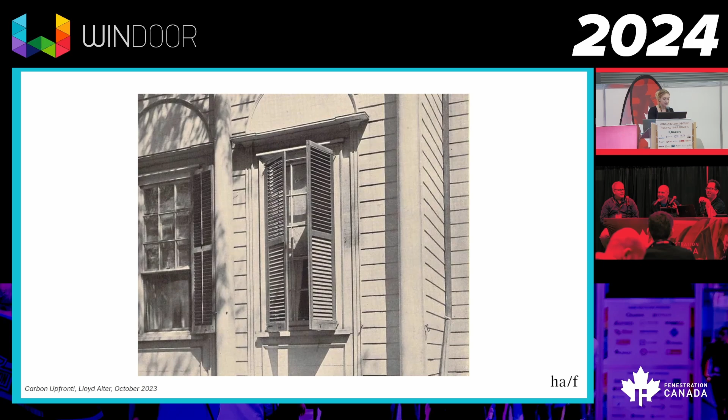And a lot has changed in 200 years. We still are designing some very smart technology, but we also have artificial light and mechanical ventilation. Windows are often treated as a more decorative element in a facade, designed from the outside according to how they look rather than maybe how they work. Speaking from an architect's perspective here.

Right, next time I need a Britney mic like you, Terry.

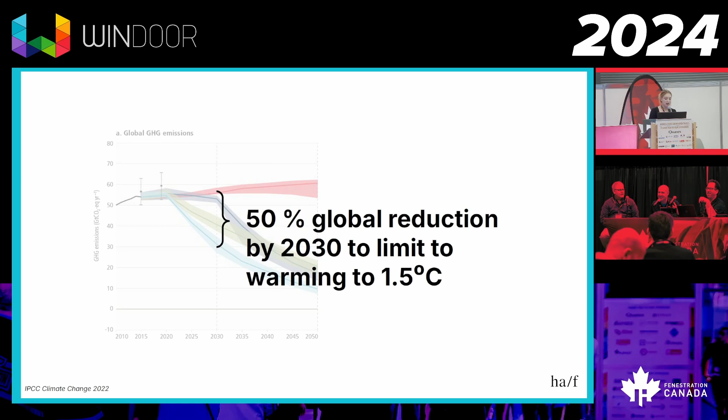And designing for climate resilience is an important part of the equation, and part of the equation as well is lowering our carbon emissions. The IPCC, the Intergovernmental Panel on Climate Change, has established 2030 as a critical year at which to chart our progress, needing to cut global emissions by 50% to limit warming to 1.5 degrees. And when we say 50%, 50% of what? In our industries, we're talking about building materials and building operations, where the building materials are roughly 11% for the core and shell, so the structure and the envelope, and then 10% for all other building material manufacturing. And then that 28% belongs to the operational emissions associated with the building. And windows and doors are important to both of these components.

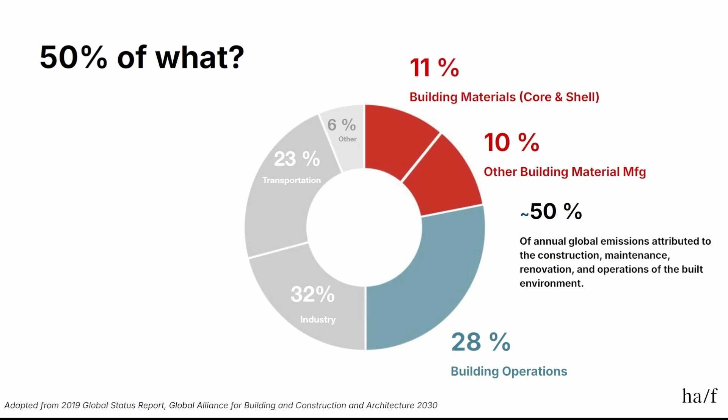And so in recent years and decades, the focus has largely been on operational carbon, the thermal performance of our buildings, what the carbon emissions are from running the building. And more recently, we've sort of exploded that view out to consider the emissions through the whole life cycle of the building and all of its material components. Is anyone familiar with whole life carbon, embodied carbon? The literacy is growing. Great. So A1 to A5, that's all the manufacturing of the raw extraction materials, making it into a product, bringing it to site, putting it into a building. In the use stage, the B stage, which is of particular interest to me talking to a group here, is all the replacement cycles throughout the building, right? When a system fails and we have to go in and replace it.

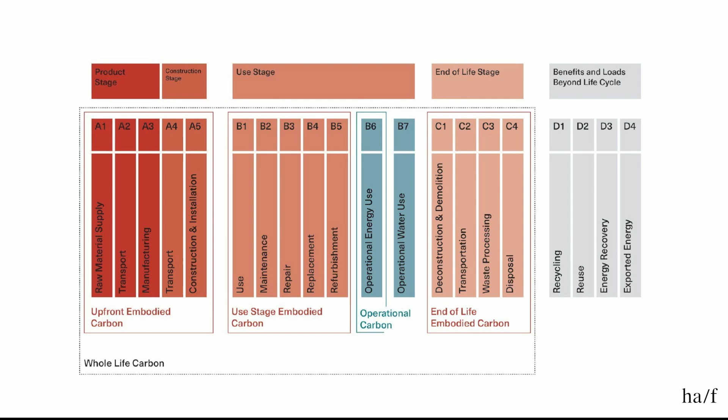Then we get into the end of life stage. So what happens when the components can't be replaced. We have to get rid of the whole system. Often we're landfilling, sometimes we're recycling. And then D is benefits beyond the life cycle. That's where we get into reuse, material reuse.

And so we can view the life cycle as a graph with number of years along the x-axis. And we can elaborate on that B stage or B phase. So we've got our practical completion in that tall bar at the very left. So that's the embodied carbon. All the red bars here are embodied carbon. So now my building is complete. I'm handing over the keys. My blue bars are the operational energy that we're just assuming is consistent over time. Of course, with a decarbonizing grid, we might see that go down.

And often operational carbon contributes more significantly than embodied carbon, but when your grid is a bit greener, we start to see some of that switch around. And so when we get to later in this presentation, that B phase is what I'd like to revisit, or maybe in the Q&A we can talk more about that.

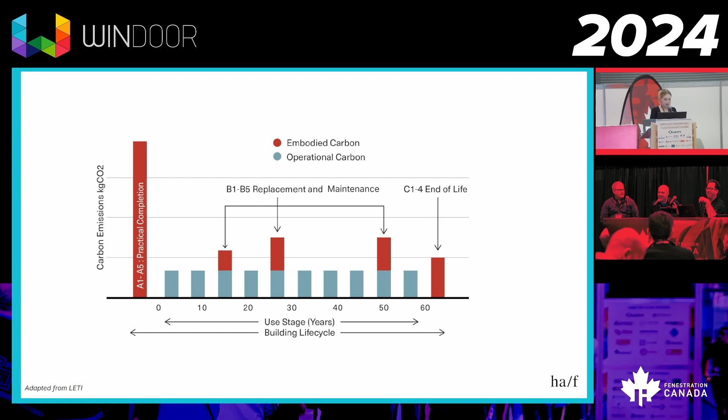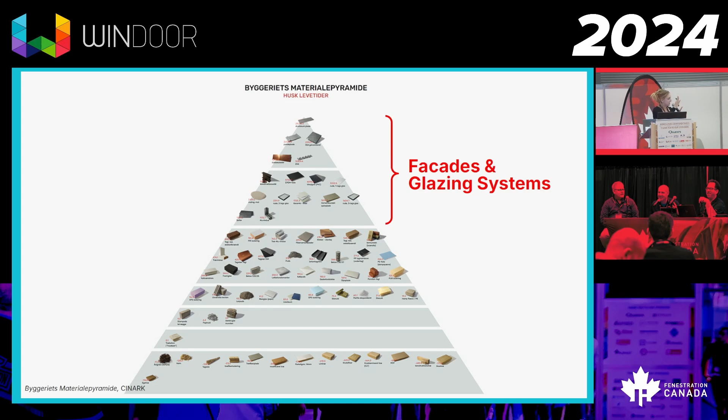It's also driven by the fact that often glazing systems are made up of materials that sit at the top of this material pyramid that tend to be a little more carbon intensive. This is a pyramid out of a Danish institute that if you go onto the website, it's live, and as you input quantities, it auto-generates what's highest carbon. It's a pretty cool tool. And of course, there's some drive in the industry to reduce embodied carbon, especially in flat glass, which typically has dominated the carbon of insulating glass units. This is a low carbon flat glass from AGC.

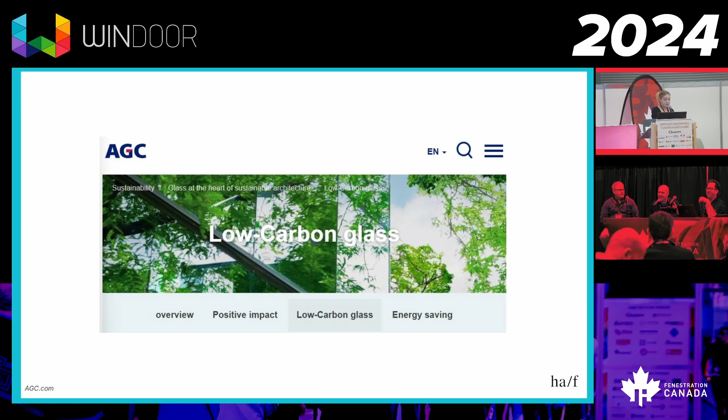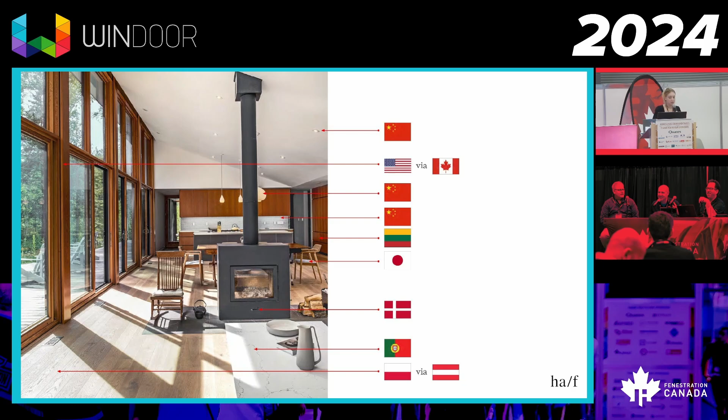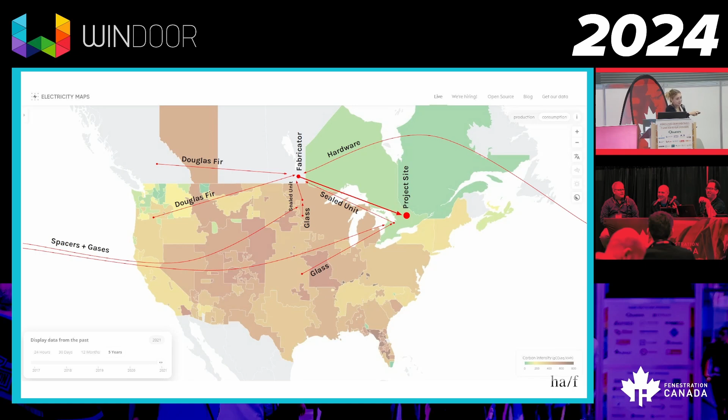And so he identified where all the materials were coming from and used EPDs, environmental product declarations, to map carbon data onto the quantities of material that were happening in his cottage. And a really interesting outcome of this was the revelation that our supply chains are quite complex. And this is specifically those big, beautiful windows, all the travel distance that the different components of those windows took. And you can see there that the sealed unit goes past the project site to the fabricator and then right back to the project site. So there's some redundancy in the transport there too. And all that transport comes with carbon emissions as well.

So what we know, my company, we're architects, but we are consultants, and we consult on anything sort of sustainability related to the built environment. We do a lot of benchmarking, life cycle assessment for firms where they want to understand how their projects are performing. We take quantities from, usually if they've got a really beautifully modeled BIM model, Revit model, that makes our job a lot easier. And we map the EPD, or the environmental product declaration, onto those quantities. We then will add, this is envelope specific, but we'll add the structure. Sometimes we go to interiors. More and more, we're looking at MEP systems.

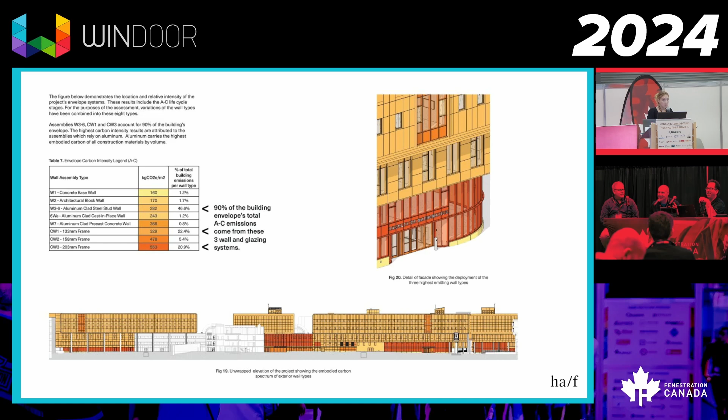And when we look at the envelope, we can create these kind of heat map drawings where very quickly we can see what the relative intensity of carbon is across different systems. And where the darker colors are is typically glazing systems. And so this kind of assessment and the visualization has encouraged us to interrogate the glazing requirements specifically here for the ground floor commercial spaces, which are often just floor to ceiling glass. Could the height be reduced, for example? Could we reduce the total area of glazing?

And by repeating this process for every LCA project we do, we are compiling a larger database of varied envelope systems. We have found that the consistent finding is that the glazing systems tend to be where the carbon lies a little bit higher, and often in that ground floor commercial. This is not to just, pardon my French, shit on everyone. I'm saying this is the opportunity, right? There's an opportunity here. And of course, when we consider the embodied carbon, it's really critical to consider the operational performance of these systems as well.

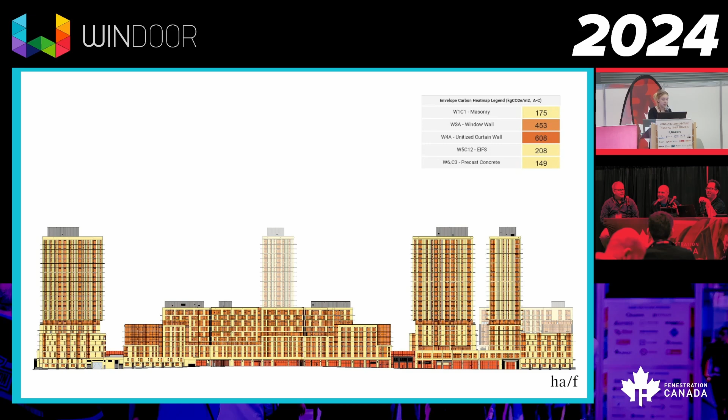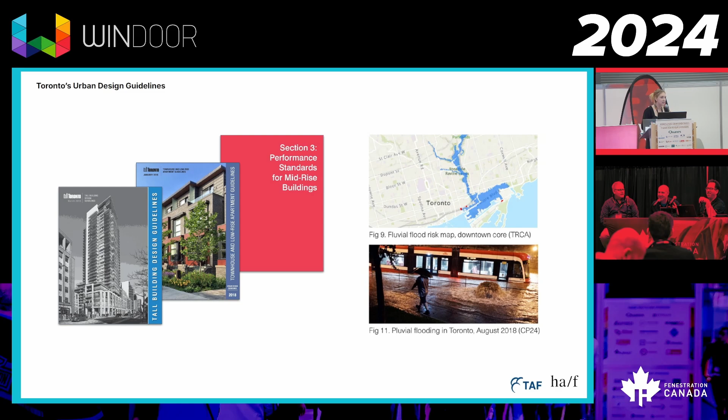And so these project-specific studies that we've done are very informative to our clients. They're informative to us. Recently, we were engaged by the City of Toronto to look at their own urban design guidelines, which were written 30 years ago, and we sort of said, what are the unintended consequences of these guidelines? Are they inadvertently causing higher amounts of carbon in our buildings?

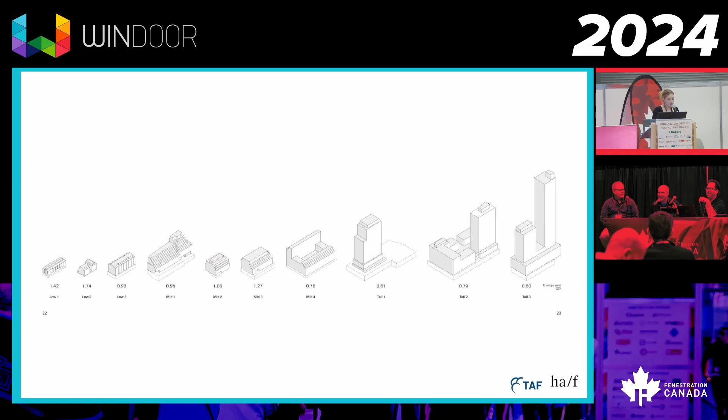So we looked at 10 projects: 3 low-rise, 4 mid-rise, 3 high-rise. You can see them there on the screen. And again, we did our little heat map trick. Across all projects, the highest contributor on average to the embodied carbon in building facades were the windows and glazing systems. Viewed across the whole life of projects, this factor can double or triple depending on the expected service life of the system. So that's when we get into that B phase. How long are we assuming the system is going to exist for? Are we actually maintaining it as it should be?

Windows and glazing were found to be the locations of greatest thermal heat loss and solar heat gain, the greatest contributors to operational emissions. And the facade of a building, as we saw before, can account for anywhere from 15% when we're just looking at those initial emissions to up to 40% when we consider the B and C phases. One of the significant factors that influences why these are more carbon-intensive parts of the building is the overall window-to-wall ratio. A lot of these towers had no opaque systems other than the shadow box that was part of the window wall.

And so a higher window-to-wall ratio can offer benefits like we talked about just before, like daylighting and views. But as I mentioned, they also typically result in a higher demand for heating and cooling. These glazing systems, we've found in the conversations we've had, and this is something I'd love to hear from the experts here, hold a greater need for maintenance and replacement over time.

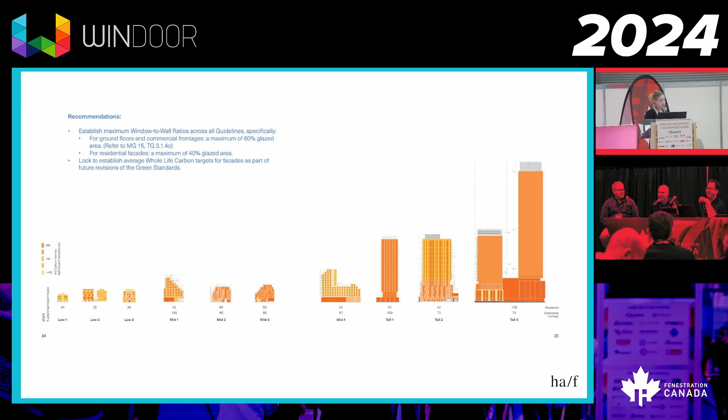And what's really critical for what I do for a living is that there is a serious lack of data to do this kind of analysis. We have some product-specific EPDs that we can use and rely on, but not a ton, right? So to make my job easier, it would be great if everyone here who works for a window company would apply a little pressure on that side, because it would just make the data more reliable at the end of the day. Before we even had whole window system EPDs, I had to model out an entire frame, get the volume, get my glass, get a volume, and build my window system myself using EPDs for each of those components. So we're moving, but it's still not there yet.

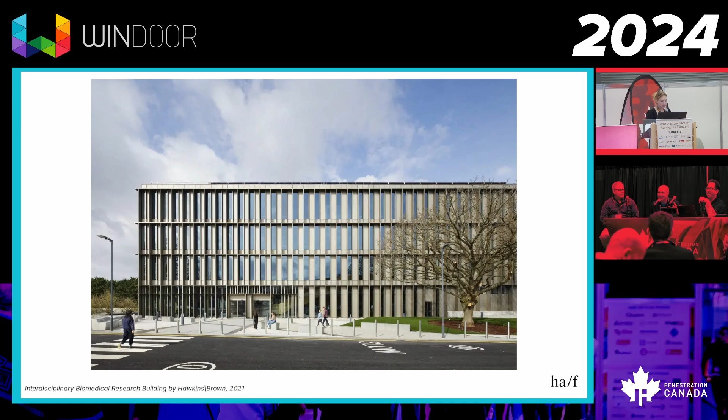In one of the projects we looked at, that I'm not allowed to share with you, it's a very large and entirely glazed project, a university facility in the US. And we did exactly that. We said, what if instead of the shadow box, we replaced every instance of shadow box with a steel stud wall, insulation and a metal panel? And we saw a pretty significant drop there, a 76% reduction.

Now, there are holes you can poke in this assessment. How do you, the whole frame went everywhere. We didn't totally get everything 100% there, but it was a good gut check to see, well, if they had designed windows where windows had to be, and then opaque wall where opaque wall could go, what would that mean for emissions?

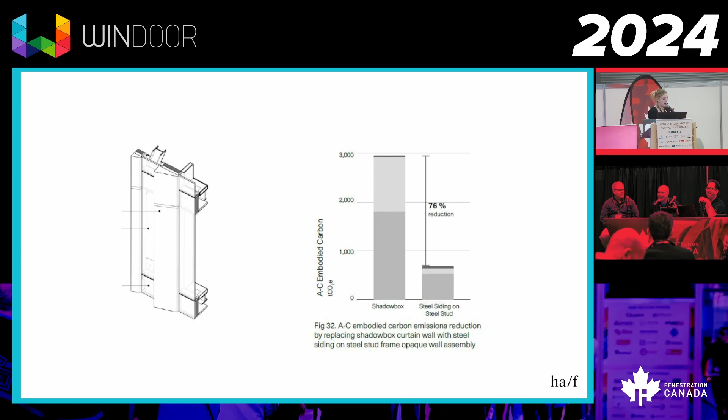And where in the building do we want larger areas of glazing versus areas where we can have smaller windows? How does climate influence how much glazing we design for? How do we rethink the current dominant ways of designing to prioritize more specific views? PietriArchitectes in Aubervilliers, France, put a picture frame around the smaller windows. So they needed the smaller windows to hit a certain energy performance, but they wanted them to still appear bigger. And so they did this nice little kind of wood framing inset window.

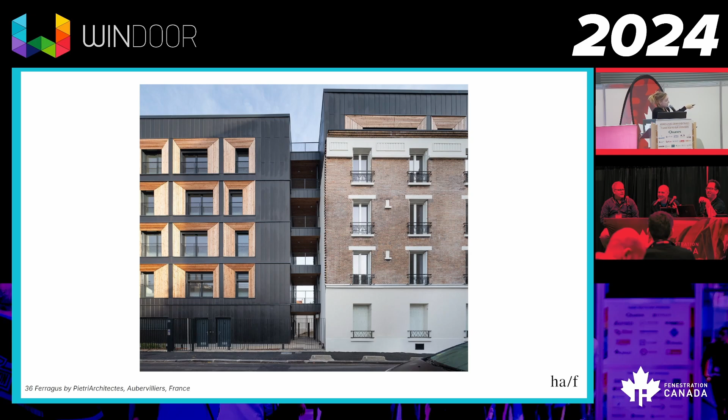And I just like this image because it's showing you the kind of new multi-unit residential build on the left with windows that are almost the same size as the older building that it's adjoining on the right-hand side.

Number 2 is we can design for wellness and resilience. So, climate change, that's what I kind of started my talk with. And I think that that is the big umbrella thing looming over us, the big cloud looming over us. I mentioned biophysiological needs. So the balancing of circadian rhythms, having visual contact with external environments, having operable windows to refresh indoor air and maintain good air quality, reduce summer discomfort if you don't have AC, for example.

This is an image from a Maggie's Centre, which is a cancer treatment center in the UK. They have them all across the UK. And so we're still seeing pretty tall glazing, but we're not seeing it wrap the entire building.

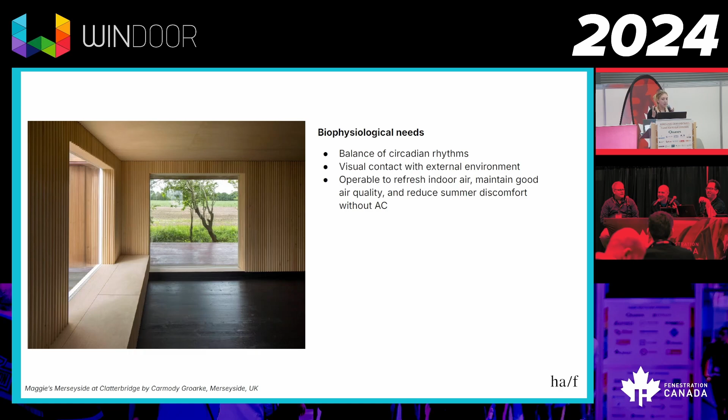In France, I was born and raised there, so there's a couple France shout-outs here. I'm a little biased. But I also just found this out while I was preparing for today. Since January 2022, there's a new environmental regulation, RE 2020, and it has requirements to reduce energy consumption, reduce the life cycle carbon, and address occupants' thermal comfort in summer for non-air conditioned buildings. Because a few years ago, when we had a huge heat wave there, a lot of people died. And that's something that we'll face in all countries.

And so they developed the metric degree hour of discomfort, DH. And this must now be considered in the design to limit discomfort during periods of high heat and to avoid the widespread use of mechanical cooling, but with systems in place to require a minimum amount of glazing as well. They usually say 1/6 of the facade has to be glazing.

And my company is currently working on, are folks familiar with the Canada Mortgage and Housing Corporation, CMHC? Yeah, right. So we're working on the new catalog, which is all focused on infill development. And we were just in Ottawa last week, we were meeting and they handed around all these old catalogs. And the big difference that I noticed between the old catalogs and how we're designing new buildings is a lot more overhangs and shading devices in the old ones.

Shutters, overhangs. These are all design features that protect the facade, right? That provide shading. So we're really interested as we're engaged on this project to see some of these get baked back into the future catalog. And how a climate sensitive site layout and building design, including fenestration, but also these shading devices and then things like natural ventilation offer the possibility to reduce our use of electricity for indoor residential lighting, as well as reducing heating and cooling demands.

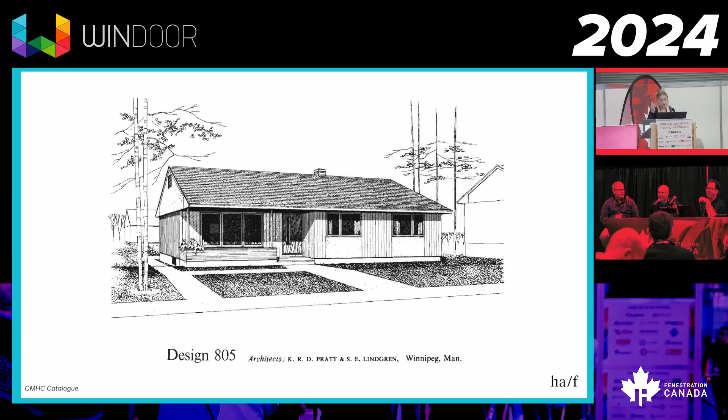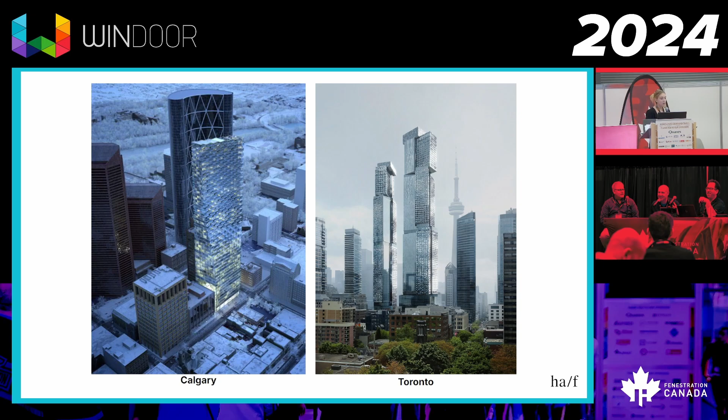Next, we come to considering whole life carbon. And I've got 2 images here, one of a building in Calgary and one of a building in Toronto. And these are both coined as high performance buildings. And it's really crucial to understand, I'm here coming from the embodied carbon lens, and I realize there's a whole other piece to the puzzle. It's really important to consider these things not in opposition, but as where the synergies are.

And for these 2 high performance buildings that we just saw, one sees about a 50-50 split between embodied carbon and operational carbon in the year 2030. So in my Calgary building, year 2030, about 48% is embodied carbon. That's really due to the grid distribution of Alberta, in which 89% of electricity is from fossil fuels. And then when we look at Ontario's grid, which is much cleaner, 34% nuclear, 28% natural gas, about 22% hydro, it indicates that the embodied carbon proportion of the whole carbon component remains disproportionately high throughout the life cycle.

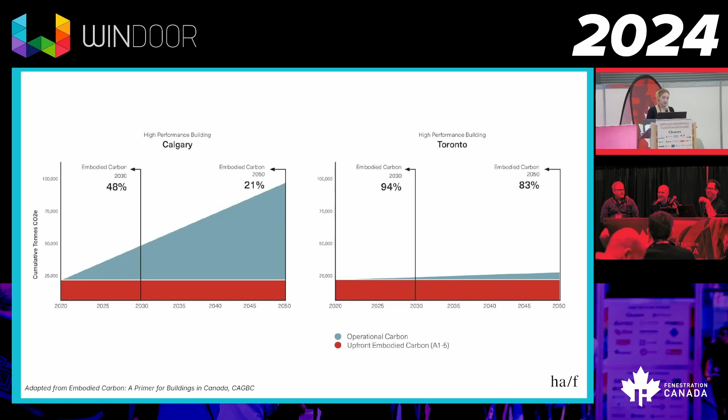And if you were at my talk last year, did you want to take a photo? I can go back. You also can get access to the slides if not already, but

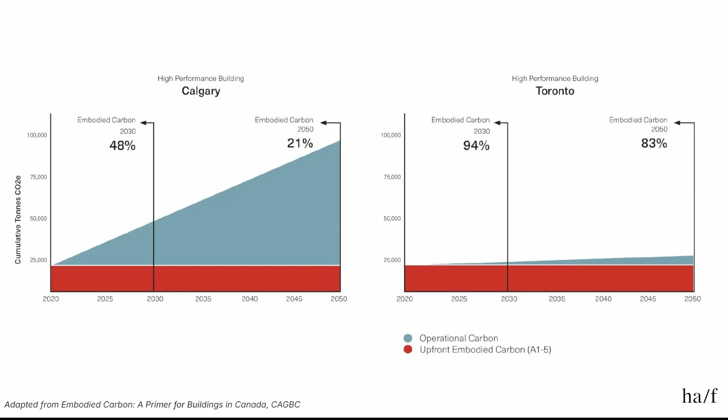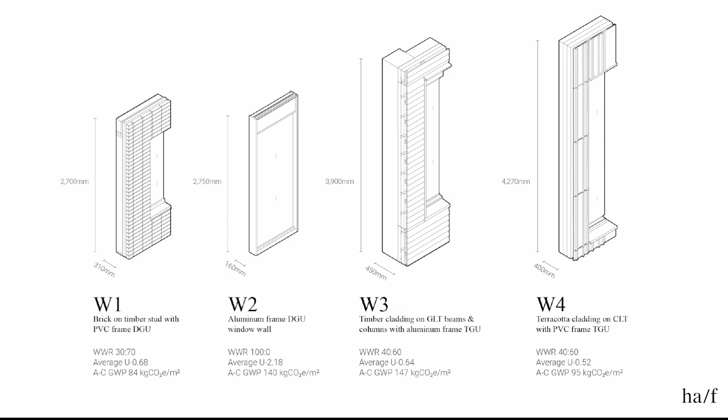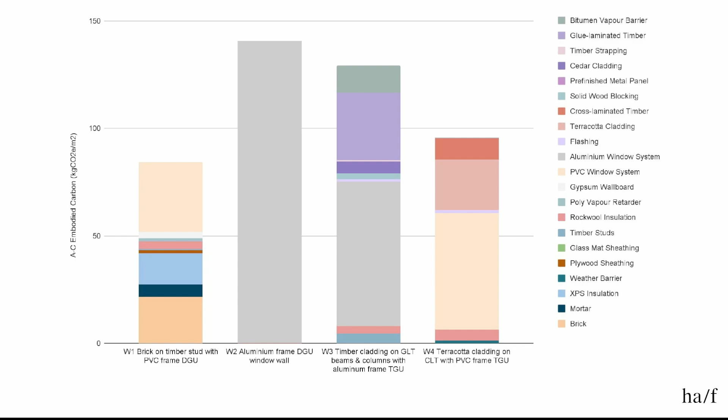In 2 of the walls, wall 1 is a brick-clad wall with PVC frame double glaze unit. Wall 2 is an aluminum frame double glaze window wall. We're seeing a significant jump in terms of the carbon emissions between each system, right? Where in the first one, we've got some opaque wall, there's better window to wall ratio, there's more thermal insulation, versus the second system, which is performing at 140 kilograms of CO2 equivalent per square meter at year 2030, our critical year. So we're not quite double, but almost double what the brick wall is performing at.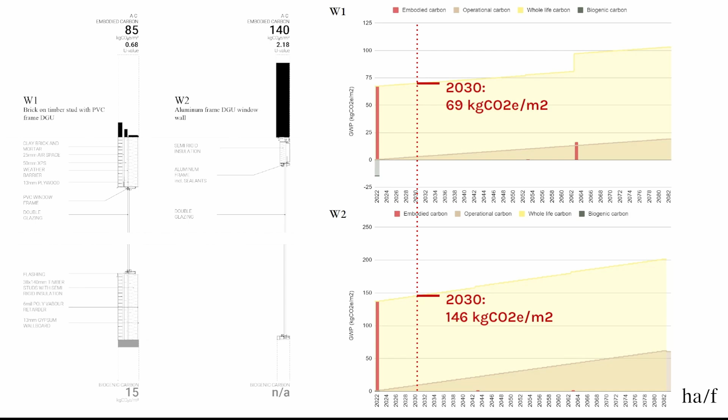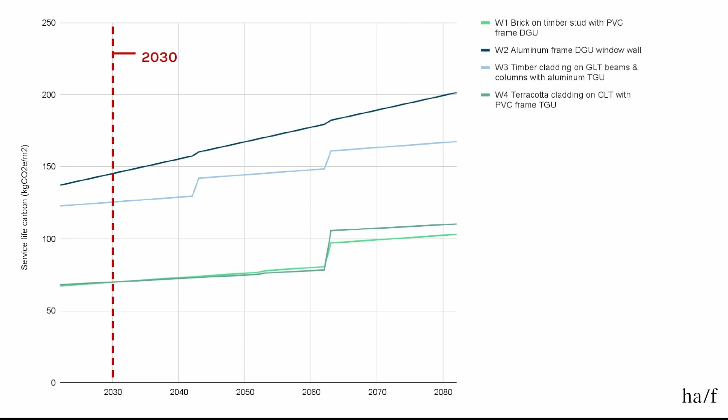And so when we take all 4 walls and we just look at their whole life carbon, again, we can start to make more meaningful comparisons across these different envelope systems. The emissions profiles that have the slight jogs, this is where we're seeing that material replacement come into effect.

Here we're looking at a comparison of 2 curtain wall systems for an office building in Victoria. This office building, fun fact, had some quadruple glaze systems that when we met with the design team, they said, yeah, we didn't actually need them to be quadruple glaze. And we're like, well, okay, great. But it was already in construction, so we couldn't get them to change their minds on that.

But based on current BC grid and electrical heating and cooling, the main takeaway here is that the whole life never crosses. So based on the regional grid intensity and the worst case scenario of no decarbonization of the grid, the crossover year between the double and triple pane systems is 2068, far beyond our 2030 or the 2050 mark.

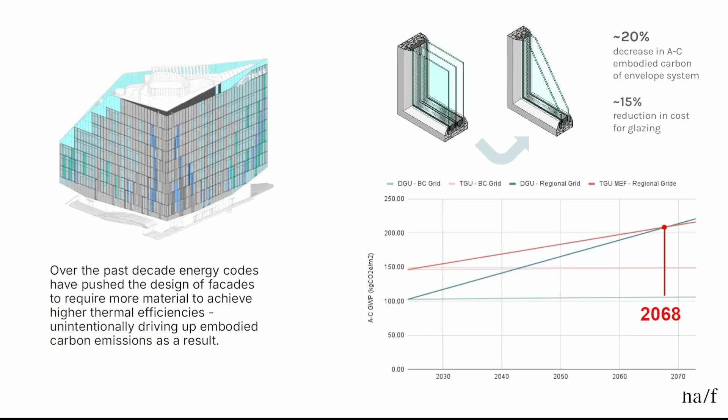And so as a company, we're interested in doing a bit of a deeper dive into this. We understand that when you make this switch, yeah, you can say maybe there's a reduction in embodied carbon. There might be a reduction in the cost. We're tracking the operational carbon, but what we're not tracking in this study is any uptick in mechanical systems that might be required. And that's a big component to this, right? Mechanical systems are carbon intensive as well. So that's the next big step from our perspective in terms of what we want to understand more in depth.

And in thinking about grid distribution, but also climate zones, a building's geography has significant influence over what envelope system is appropriate, per what we just went over. So maybe triple glazing makes a ton of sense in one province or state, but not so much in another. What would be the case in Toronto, Calgary, LA, Miami? And then when you layer on the climate resilience piece, it gets slightly more complicated because we're designing for that as well.

And so we graphed it. We said, what's the crossover year in each of these places? And so we're seeing that in some, Minneapolis, 2030, okay, maybe triple glazing makes a lot of sense there. But you're seeing Toronto is not even on the graph. We're over in 2147. So maybe dual pane is okay there.

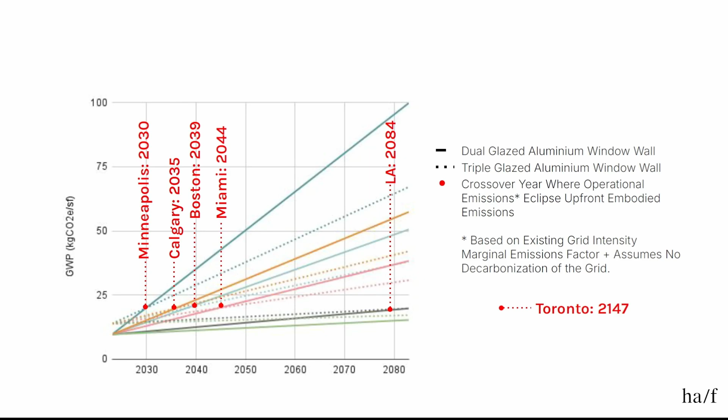All right, now the topic I'm really excited about hearing from everyone here is planning for maintenance and durability. And so when you consider the whole life carbon and not just the upfront carbon, those A stage emissions, we have to really understand what's happening in the B phase. And I realize that's a lot of projection. It's based on a lot of assumptions. And that's what we're going off of. We're going off of what an EPD tells us, how long something will last. We're going off of what a contractor tells us is happening in the building.

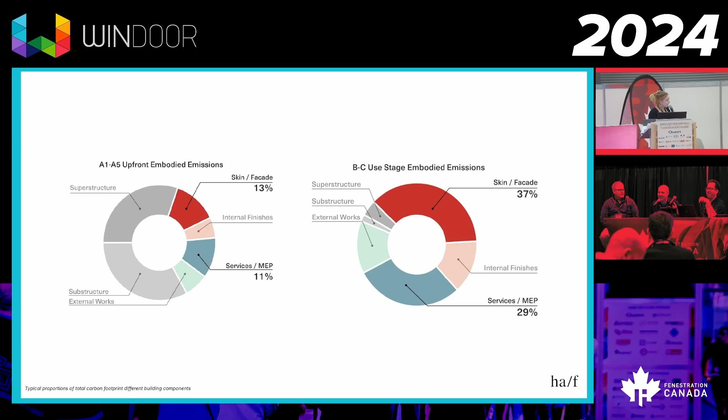I'll just recall this graph quickly just so we understand. On the one hand, we've got the A emissions, so around 13%, but when we expand, we've got all those replacement cycles that contribute. And so ideally, glass replacement would be easier, aka quicker.

For glass, within buildings, there's an escalation of size and geometrical complexity. Lots of within-project variation. I know I've looked at these drawings. It's like a zillion types of windows. I don't know how you feel. I'd love for it to be simplified. And then there's a real supply chain complexity that we saw with that map we were looking at earlier with all this international sourcing. And if we consider future weather events, all of these present more challenges for rapid replacement.

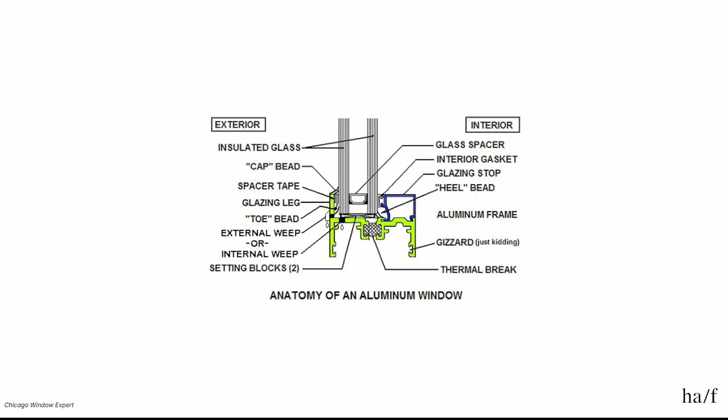And so on these service life assumptions, how do we bake that into our models? Now, option one would be that the entire system, let's say the frame and the glass, gets replaced at 35 years. And that's often been what we do because we've heard from various people who build the buildings that rather than go in and repair the sealants and the gaskets and replace the glass, they're not doing that. They let the system fail and then they have to replace the whole thing. So that's where we're seeing the really significant spikes in carbon.

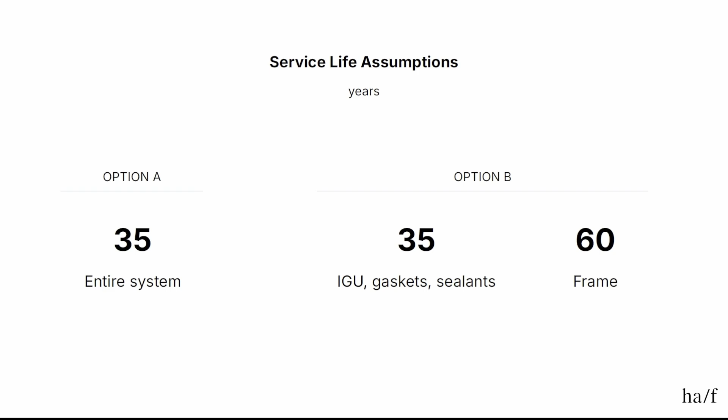But we have done some projects where they've been a little more thoughtful about the maintenance plan, and the frame is to remain, and all they're going to do is go in and change the IGU, gaskets and sealants. And so then we break it apart and we say, okay, some of these components are going to last the shorter amount. We'll see a smaller spike, but the frame will last the whole service life of the building, which we often assume at 60 years.

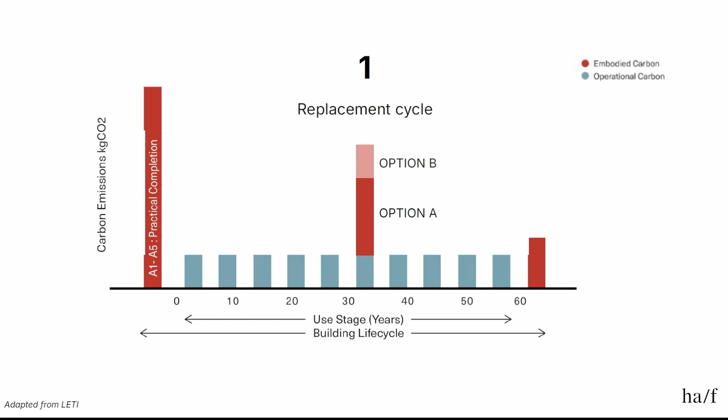And so what that means when we bring it back to this whole life carbon graph is we've got our big bar, the main emissions are most often in that A phase anyway. But then at year 35, option A, where the whole system gets replaced, would be a bigger bar. Option B, where only the glass and the sealants and gaskets are replaced, is much smaller. So right there is a really clear opportunity for reducing our carbon emissions. And I'd love to hear more about that piece from all of you too.

And I'd like to end on where I hope to see this industry going a little more, which is embracing circular methods. I'll start by speaking about the Empire State Building. In August 2009, they went through a retrofit, and they planned a complete redevelopment of the building to make it one of the most energy efficient buildings in New York City. It was through a combination of 8 energy efficiency projects, which included a retrofit of, I think it was 6,500 windows across the whole building. And importantly, the reuse of 96% of the original frames and glass to achieve this retrofit.

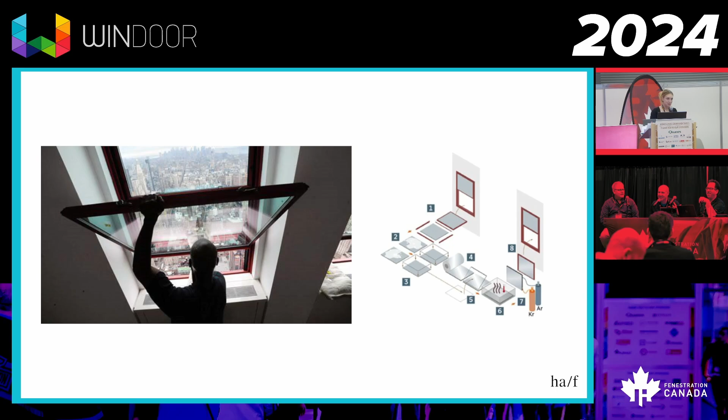And so thinking through the various materials of these components, the frame systems, we've got fiberglass, we have some wood, we have some PVC, we have some aluminum, and how each of these facilitates or hinders potential reuse and recycling. It's not about saying, no, we can't ever use that. It's just what are the options for making it more sustainable in each of those buckets.

And there are tools that exist to assess the circularity of these systems. This is one from One Click LCA, where on the one hand, you're testing how much circular input there is, so how much recycled content is going into the system. And at the bottom of that circle, where the colors are coming out of the diagram, is its ability to be deconstructed and reused.

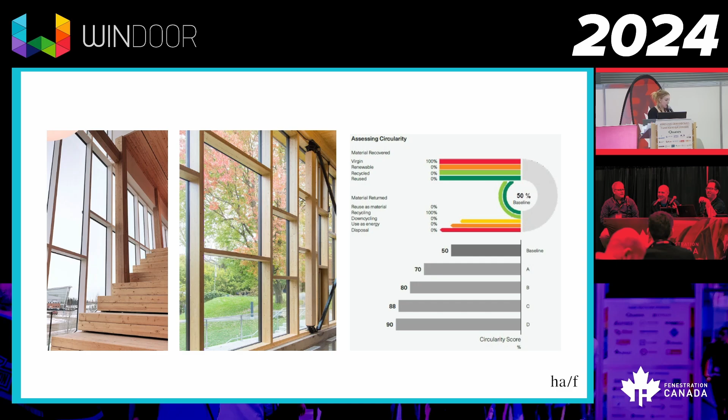And so how that looks when we scale that up to a portion of a facade, we can use the same tool. And, again, based on some assumptions, we say most of these components are virgin materials, they're non-renewable, right? So a low score as we head in, not a ton of circular materials heading into the system. What we're returning is also pretty low. Most of it's going towards disposal at 65%. Some of it is going to recycling.

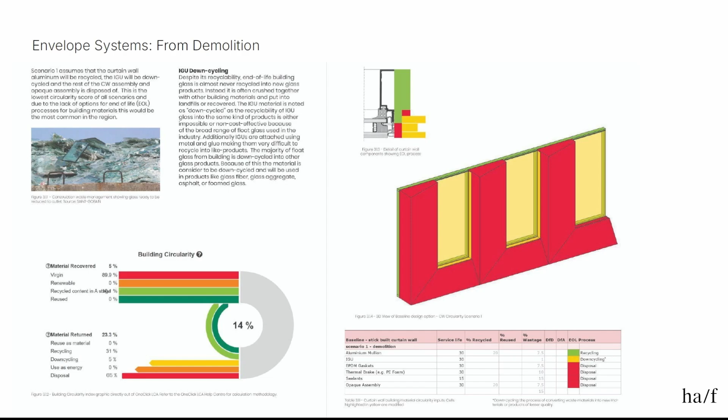And how we might move this towards a more circular world, right? So we're seeing more circular components coming in, less virgin material, more reused components, more recycled content in our components. And then on the outside as well, how are we able to take these systems apart to reuse a glass panel as a glass panel or a frame as a frame?

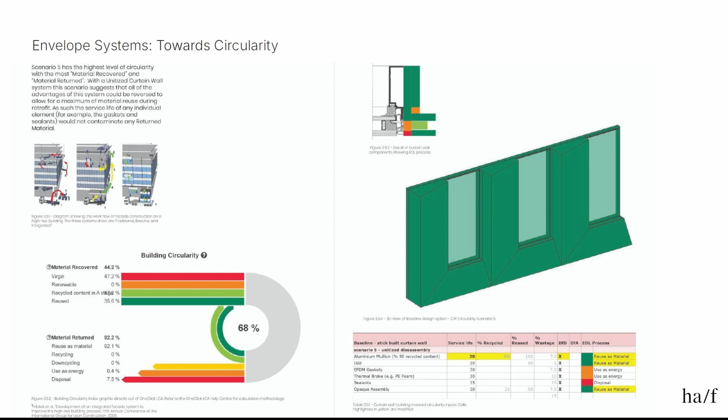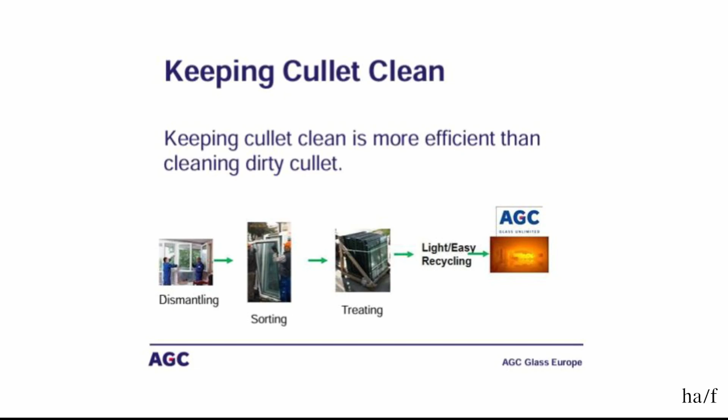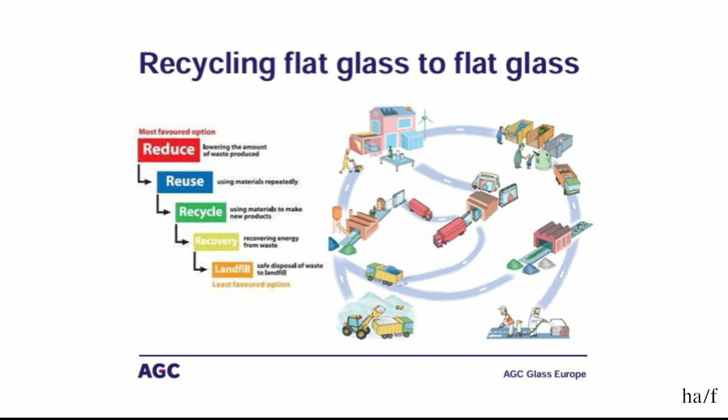And I spoke about AGC before. I have no affiliation to AGC, but we've had a meeting with them recently and they were speaking about some of the work they're doing. How you might achieve some of this, right? Keeping cullet extremely clean. Keeping it clean is more efficient than having to clean dirty cullet. And embracing the waste hierarchy pyramid. So we're reducing at the top here, reducing building new, we go to reuse, we go to recycle, recovery, and at the very bottom of the pyramid, which is our least preferred option, is landfilling.

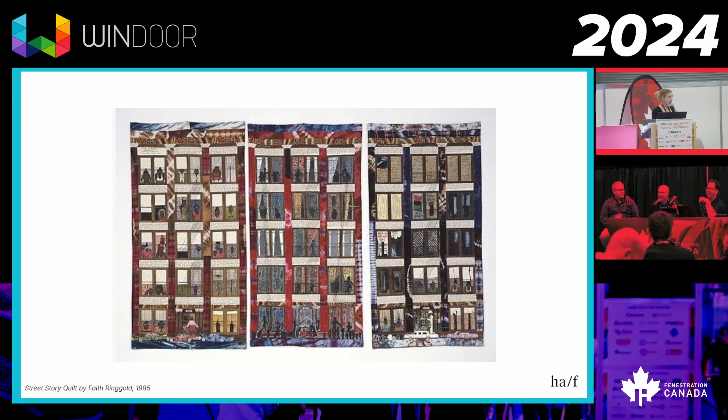So I just have some concluding thoughts. I'm going to start with a bit more of a poetic ending, and then we'll get into a bit more of the technical stuff. But as I mentioned at the beginning of this, windows have significant social and physiological benefits. They connect occupants with the natural environment. They provide daylight, they provide views, they improve mood, reduce stress, and enhance overall well-being. And windows are often featured in artwork. This is a piece by Faith Ringgold.

And just like the diagram that AGC had in their slides, we often rely in the LCA world on this hierarchy of mitigation, where there's potential for impact reductions that scale down from build nothing all the way down to building with lower carbon materials. And so the impacts that all building materials can have can sit somewhere in this or across this, right? It can be about using less material. It can be about using lower carbon materials. It can be about building for sufficiency, right? Do you need tons of windows or smaller windows?

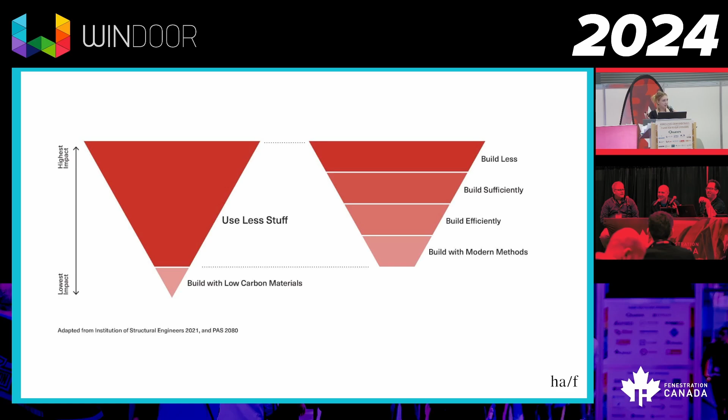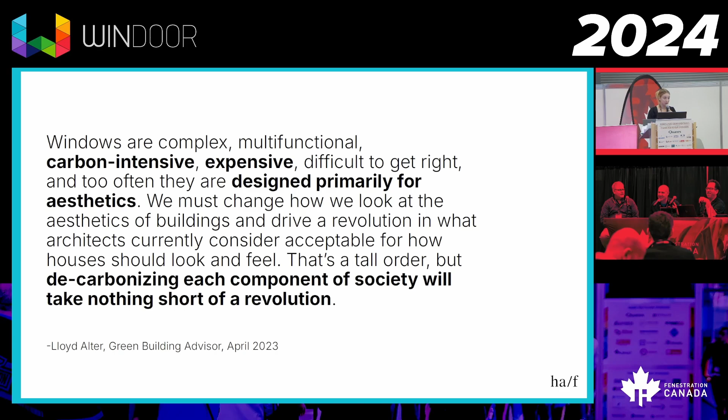And I'm just going to end with another quote by Lloyd Alter. You know, windows are complex. They're carbon intensive. They are often expensive. We're dealing with that on the CMHC catalog right now. Too often, from the architect's side, they're designed for aesthetics. And so really it's about working together to redefine what the aesthetics of our buildings are and drive a revolution, in Lloyd Alter's words, which might be a tall order, as he says, but decarbonizing each component of society will take nothing short of a revolution. And that's all from me, and I look forward to our Q&A.

Good morning. Thanks for the presentation. So I'm Raymond Roy with Guardian Glass. So actually I was on that project, Empire State Building, doing the retrofit of all the glazing for, as you say, 5500. One thing that was unique about that, and to your point about retrofit in the sash, a couple things. Longevity of the IGU. We're seeing the envelope being pushed on the IGU life expectancy, like with VIG.

I think that's very positive looking, right? Because we're far beyond what you'd anticipate with IGCC or IGMA, or things of that nature, 20 to 30 years. Maybe the life expectancy, as you're saying, maybe 60 years. We may have some potential there, right? Where the service life of the IGU matches the frame.

The other part is the retrofit, in which, Terry, maybe you can chime in on this, but on that particular project, the Empire State Building, it happened to be a mechanical aluminum window. So with a gasket. So basically you could unscrew it, pull it apart, replace a gasket, put it back in. On other projects such as wet glazed or structural silicone glazed, I think this would be a little bit more of a challenge because you have a lot more destruction.